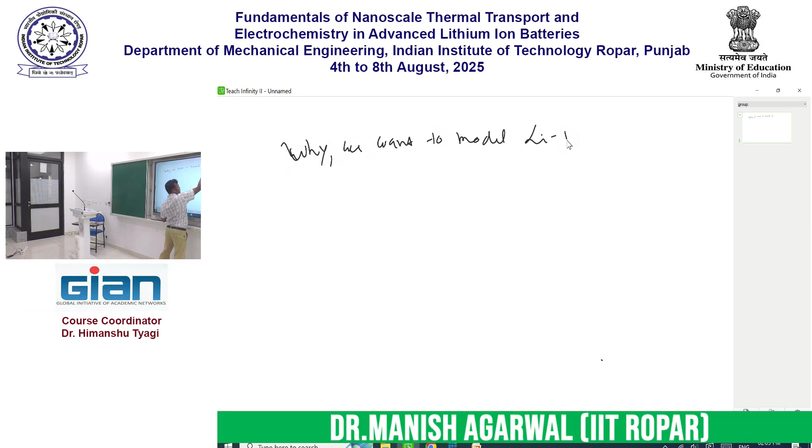So why? You can actually keep on asking or interacting. Why do we want to model the lithium ion batteries? Any comment or any input from the audience?

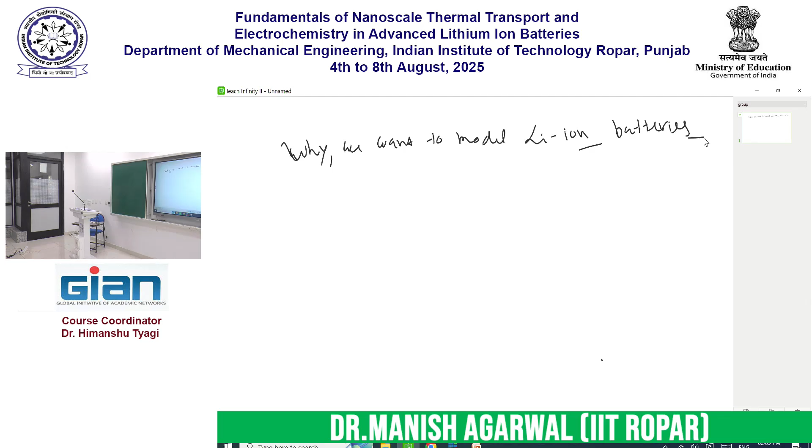No, I couldn't get that. For optimization of what? No, no, but that is fine - that is always the goal of any simulation, it's trying to minimize the experiment. But that is a very generic statement, right? First, the question is why - like what answers are we looking for from the electrochemical battery simulation?

To understand the quantitative aspect. Okay, so you understand the quantitative aspect, right? Which specifically quantitative aspect? Where we have a list of battery related parameters - current density, charge density, charge carrier, chargeability, and other kinds of things. So these are actually, in case of lithium ion batteries, physics-based detailed models. So we are actually going to understand how things are happening in the positive electrode, negative electrode, and what is happening in the electrolyte. So what are the outputs we are looking for?

That is again a bit generic. We ultimately want for any system, we want the efficiency to be enhanced, but specifically, what are the outputs we are looking for? Amount of the energy stored. Okay, so fine - amount of energy, or amount of energy I can draw in a particular cycle. That can be one of the outputs.

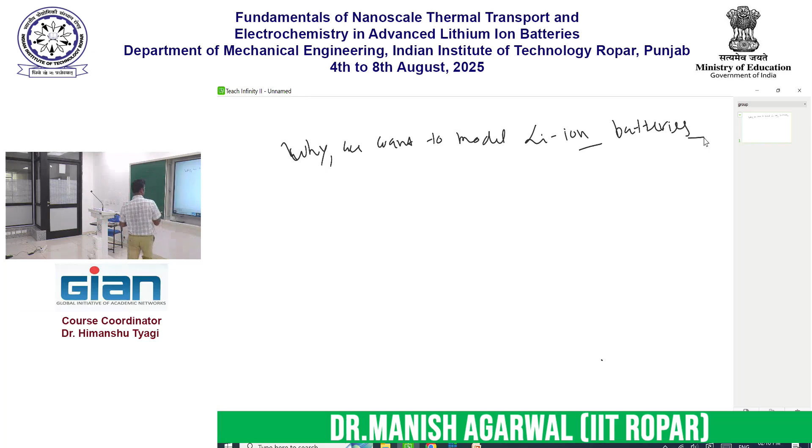In particular, let me do it - so ultimately, one of the plots that I am looking for is the voltage that is going to be produced from the battery and the time, or in some way, state of charge. So how is the voltage response of the battery? What is the typical voltage of the lithium ion battery? Anybody know?

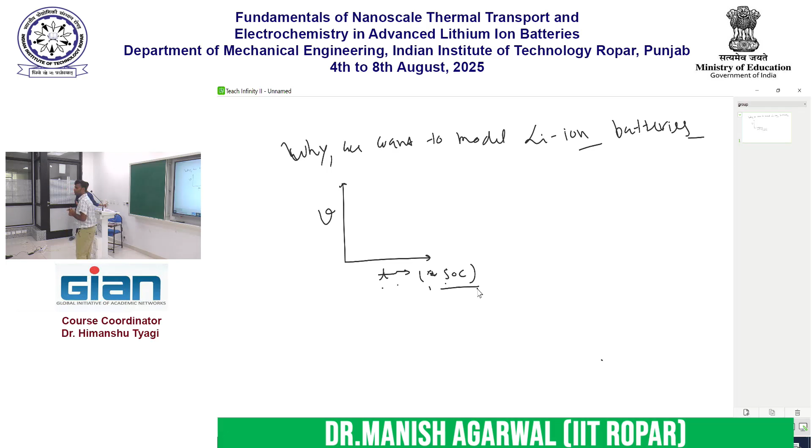So what is the typical voltage of a lithium ion battery? Okay, 4.2, 3.6 — these are the typical numbers. But that is actually when the battery is fully charged. When the battery is 100% charged, the typical voltage is 4.2V. But slowly the terminal voltage actually decays, right? So the typical graph looks like this.

But this is actually not fixed. This particular response depends on how fast you are doing the charging, or in this case discharging. It is not something which is a fundamental characteristic of the battery that will work for every kind of load cycle.

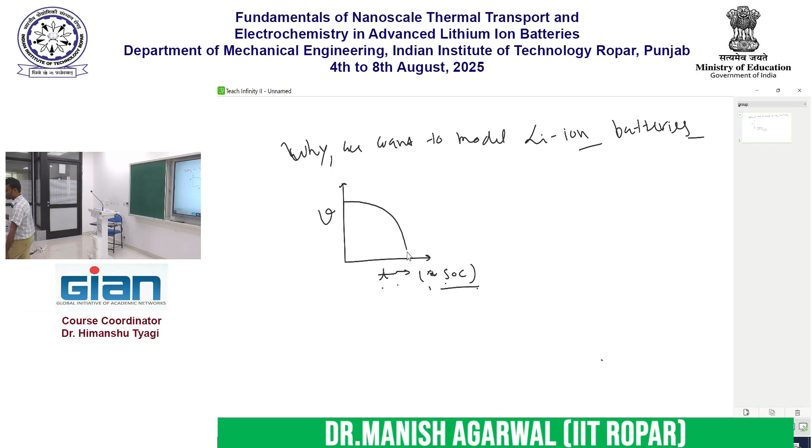For example, nowadays there is a lot of emphasis on battery development, like how fast you can charge your battery. You want to charge at 1C, 2C, as fast as possible. But why doesn't everybody just start charging the battery faster by supplying more current? Because there are ramifications to that.

So there's the theoretical capacity and the actual capacity that you get out of the battery in a particular condition. That depends on the charging or discharging speed. So we want to know up to what charging or discharging rate we can actually draw a sufficient amount of power.

Second, for the thermal aspect calculation, we need certain parameters from the electrochemical physical model — for example, voltage, current, and other macro level parameters. So those we also want to give to the thermal model. This is one more aspect.

Another aspect is optimization. Ultimately I want to design what is the separator length, what is the porosity of the separator — I will explain those things in more detail — and what should be the cathode particle radius or positive electrode radius. I want to determine all these parameters and see how they actually affect overall battery performance.

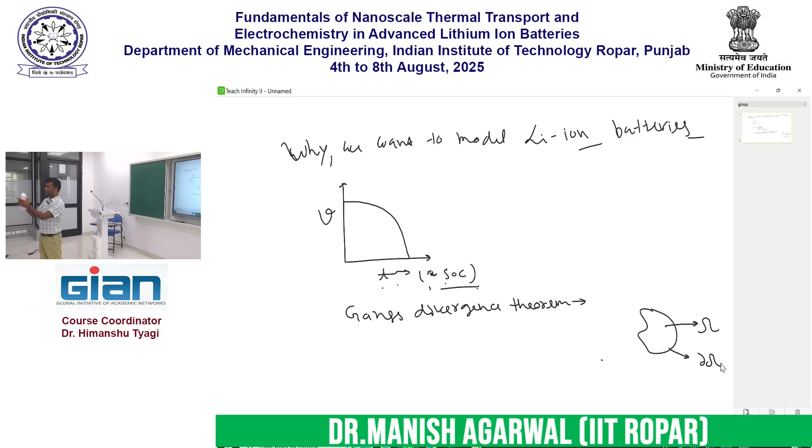So let's say there is one particular arbitrary domain which has a volume V here — let me call it omega, to be consistent with the rest of the lecture — and the boundary of this, or the area of this, I call del omega. These are the typical notations I am going to use: omega to refer to any domain, capital omega, and the partial of omega to denote the boundary of the domain. You can imagine, for example, this is a bottle, and the boundary of it, whichever is on the surface, is the partial omega, and the overall domain is omega.

Now, the Gauss divergence theorem tells that suppose there is an arbitrary vector v, and I draw a normal n tilde — a unit vector which is normal to the domain boundary. Then the integration of v tilde dot n over the boundary is equal to the integration of the divergence of v over the omega.

Just for understanding, the divergence of v is defined as del v1 over del x plus del v2 over del y plus del v3 over del z, where v tilde is an arbitrary vector with three components, v1, v2, and v3. So the divergence of that vector is defined as del v1 over del x plus del v2 over del y plus del v3 over del z.

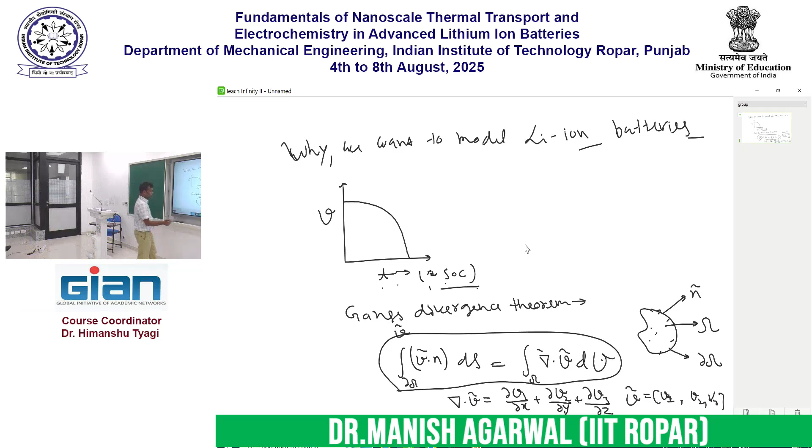So the most refined version of the physics based model is known as micro scale model. That is the most detailed one, where you are putting almost everything that is there in the battery into your model. That is the most detailed kind of calculation that you can do.

There is a slightly coarser level of the model known as the homogenized model, that is the second level of the model, and so there is a simplification from the micro scale to the homogenized. Again, I will go into the detail as we go along. Right now, just giving the overall picture.

Then there is a model called DFN model, or more popularly known as P2D model. This is perhaps the most popular model for battery modeling. Whenever you do electrochemical analysis in software like COMSOL, by default you are using P2D or DFN model. So this is a kind of 1D model, actually known as pseudo 2D model. Why it is known as that, I will explain to you later.

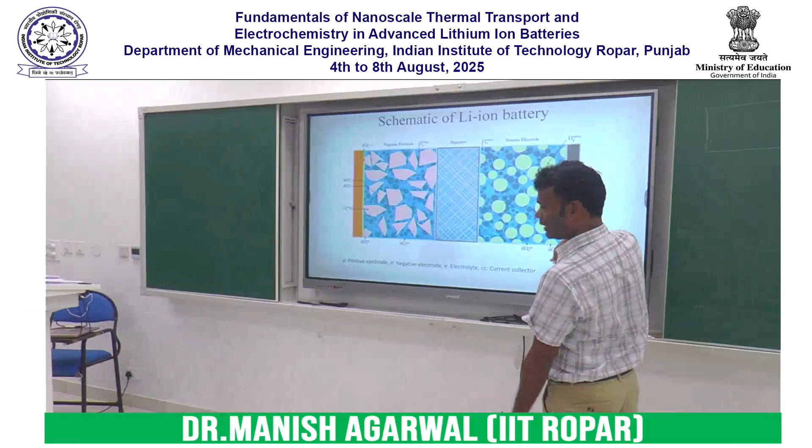So the first thing, let's start from the rightmost and leftmost. There are two blocks, known as current collectors. They are just metal strips which are taking out the current from the lithium ion battery to the external circuit, nothing much. So these are not something fancy, these are quite preliminary stuff. Now after that we have the positive electrode. I will just denote it with the symbol P.

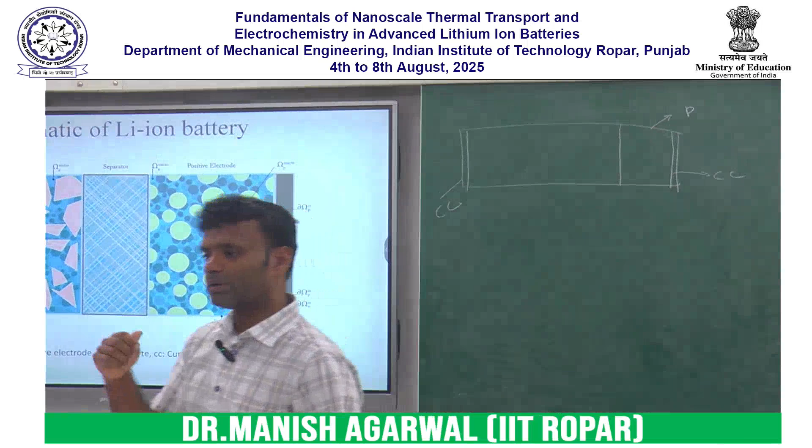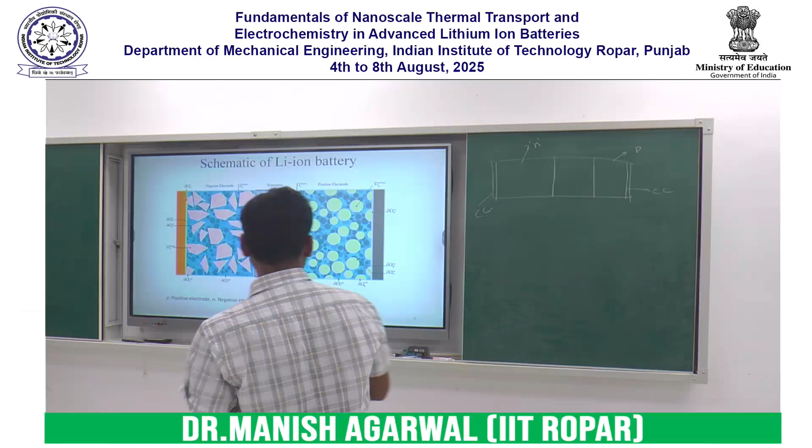Then there is a separator, and then there is a negative electrode, which I am going to denote by letter N. And separator, anyway we won't need the symbol, but for completeness, let's write S.

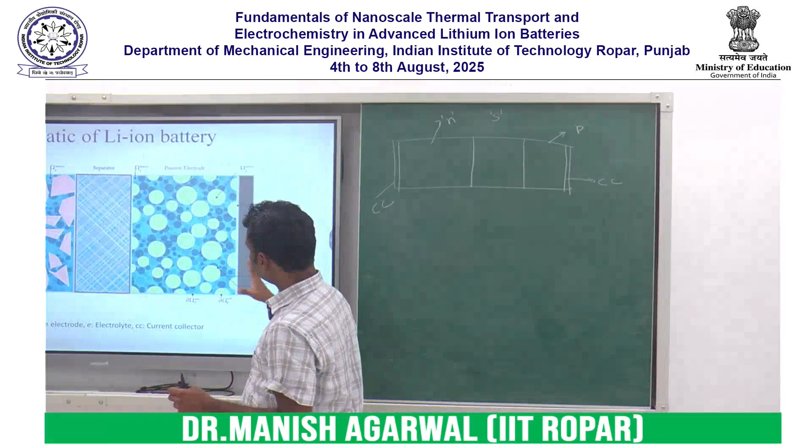So let's try to see what it is contained. If you see this positive electrode, there are some kind of particles. I think Ankurji was talking about some kind of lithium compound which makes the positive electrode, if I am correct, some kind of lithium cobalt oxide. So these green particles are those only, or an alternate to that. For example, I think there is manganese, NMC, yeah, it is called NMC. So there also it can be actually a particle of those.

So ultimately, whatever the underlying material is there, these are the particles. Now you see a bunch of black particles flowing here and there. These are binders to keep all these particles, where the lithium is there, together. These binders are not actively participating in the chemistry of the battery; they are just there to act as a glue.

The blue thing I am showing is actually the electrolyte. Unlike the conventional picture you have, where the electrolyte is different and the electrode is different, this is not how the lithium ion battery is. Inside the electrode also there is an electrolyte, and this is a very important thing to know when you are doing the modeling.

So electrolyte is present in the electrode also. The electrode is a porous medium where the electrolyte and the electrode particles are actually present in the same domain. And there is another name for these particles: they are commonly referred to as active particles, because they are actively participating in the overall domain.

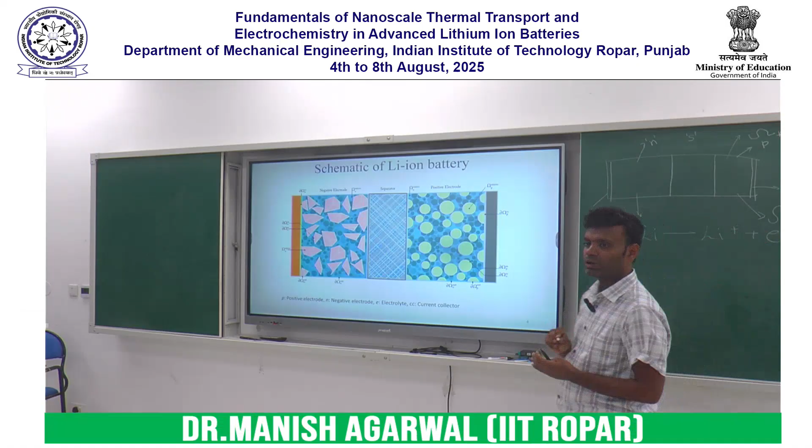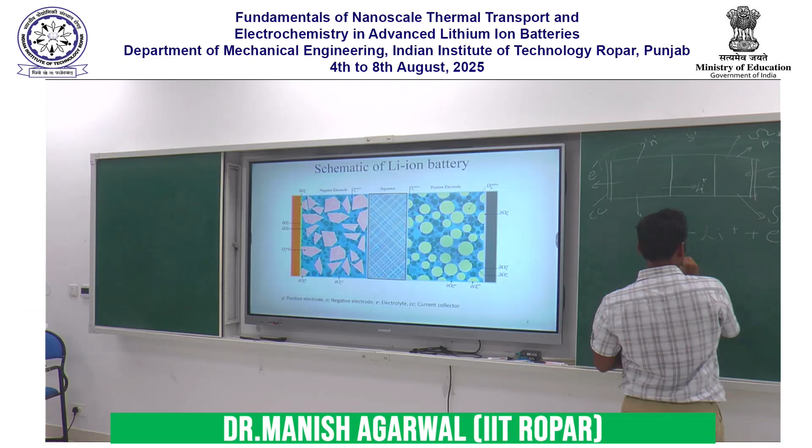So what is happening? Lithium here is actually getting broken into Li plus and electron. The positive ions are actually moving toward the positive electrode, and the electrons are going away through the external circuit, taking the whole path, coming back here, and then Li plus and electron again make the lithium.

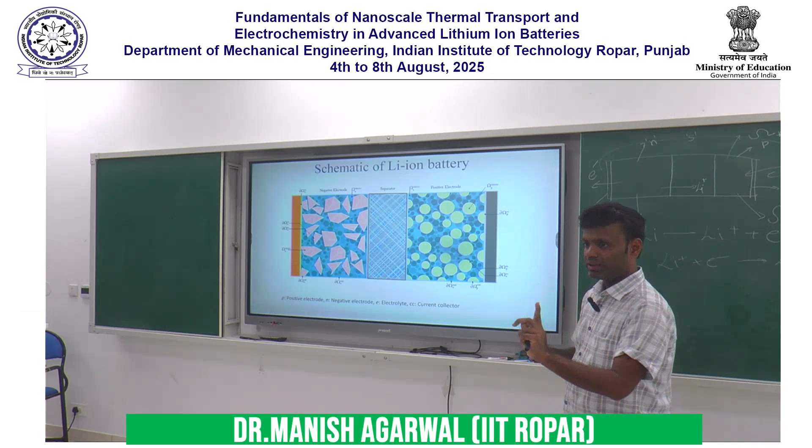So in the electrode, there are two things that are moving. What are they? One is lithium, not lithium ion, and electrons. Lithium ion is not moving in the electrode. Lithium and electrons are moving there. Lithium ions are moving inside the electrolyte. These are the two things which are moving: in the electrode, and what is moving in the electrolyte is the lithium ion.

We should know which species is present in which domain; only then can we actually develop the model. So lithium ions are moving in the electrolyte. Apart from the lithium ion, which is known as cation because it's a positive ion, there are negative ions also moving. For example, if you have LiPF6, then it is Li plus and PF6 negative, sorry I don't remember the exact formula, LiPF6, and here also it will be PF6.

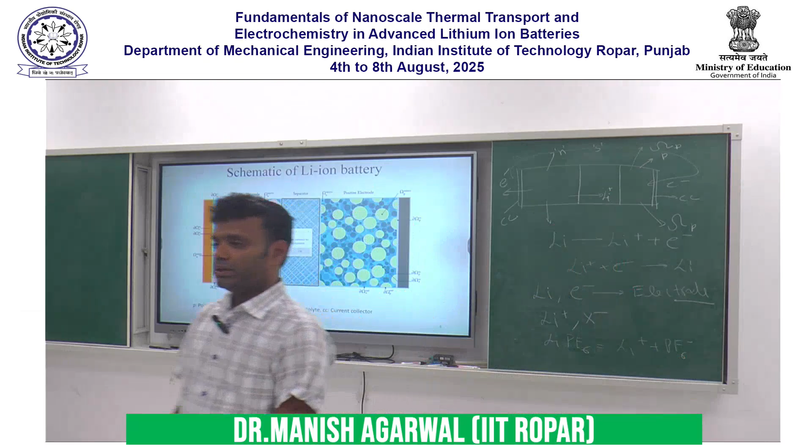So there is a cation. So in the electrode we have lithium and electron. In the electrolyte we have the lithium ion, and I am writing X minus for some kind of anion. So this is in the electrolyte.

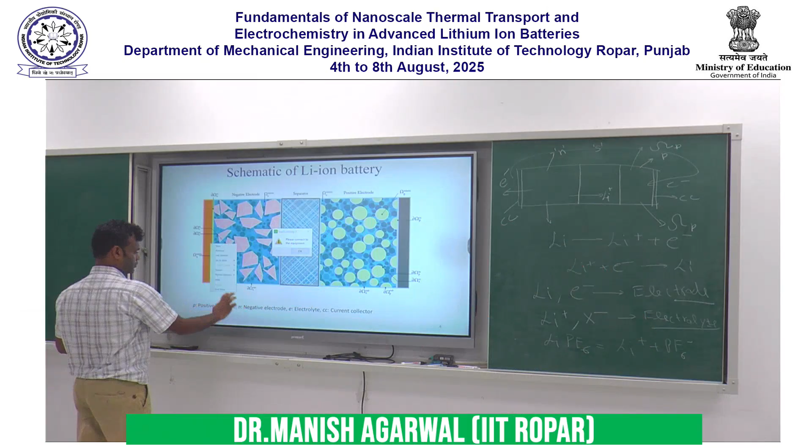Fine, so let's go to now again. Sorry.

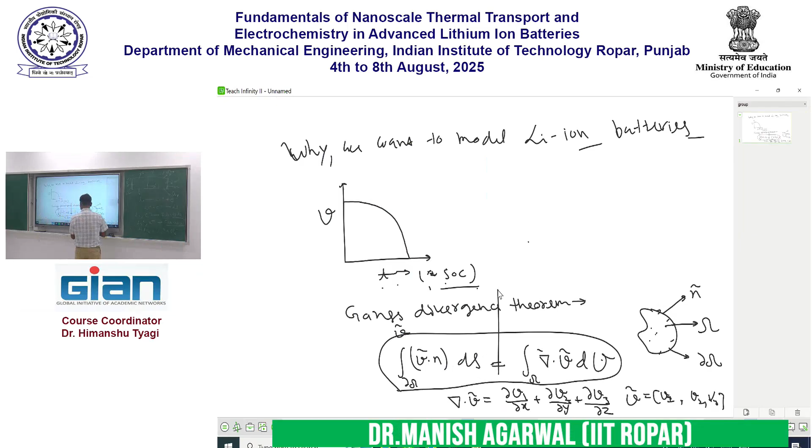Acha, new one means this is what. Fine, thanks. Okay, fine. So now let's talk about the electrode, right? And then we'll go to the one.

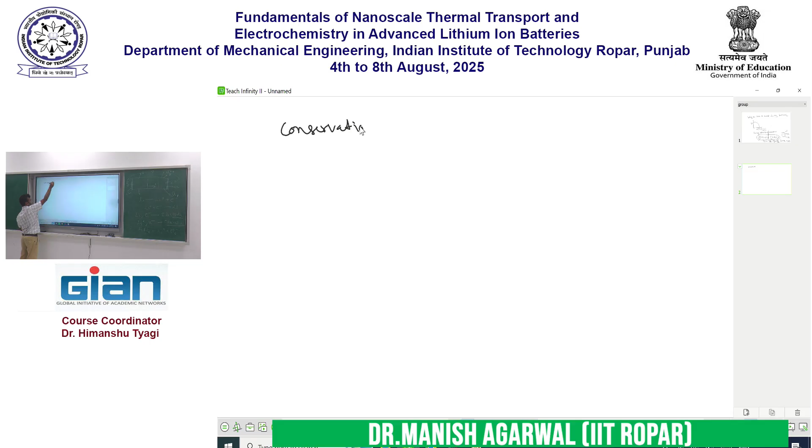Right, so in electrode, first let's talk about the conservation law in electrodes. Okay, sorry, let me know because sometimes this pen is not writing.

Okay, so first, there are two species. Let me define something. Do you know what is Faraday constant? Or do you know first what is a mole? What is 1 mole? There is a number, right? 6.023 into 10 to power 23. So 1 mole means this is the number of atoms or molecules of that particular quantity. So this is just the actual number, not the mass or something.

And the Faraday constant means the charge that 1 mole of electrons carries. That is the Faraday constant, the amount of charge present in 1 mole of electrons. Okay, so conservation law in electrodes. Fine, so let's talk about the 1 second.

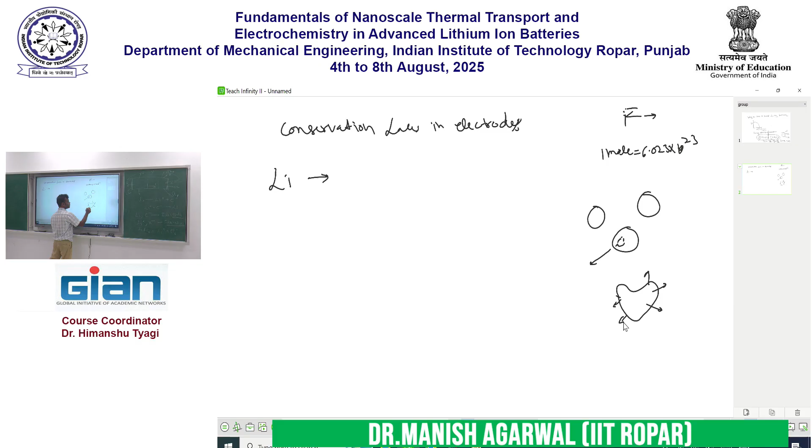So then there are two things happening. One, the lithium ions are actually moving out, right? By convention I'm taking the moving out thing; if I take the negative of that, that is the moving in thing. So the moving out, I'm going to denote the flux as N tilde lithium, that is the flux. You understand flux, right? For example, if there is a pipe flow happening, what will be the flux?

That will be the velocity into the area, the amount of flow that is actually happening. So this is the flux, and the concentration of the lithium ion I am going to denote by C_Li. Okay, I have to write it very slowly. So this C_Li is the concentration of lithium. The unit of that is mole per unit volume.

So now let's do the mass conservation. The amount of lithium inside the volume is the concentration C_Li, integrated, or you can denote it by dV. This is the total amount of lithium present in this volume. And what I am doing is writing the derivative with respect to time, how much it is changing.

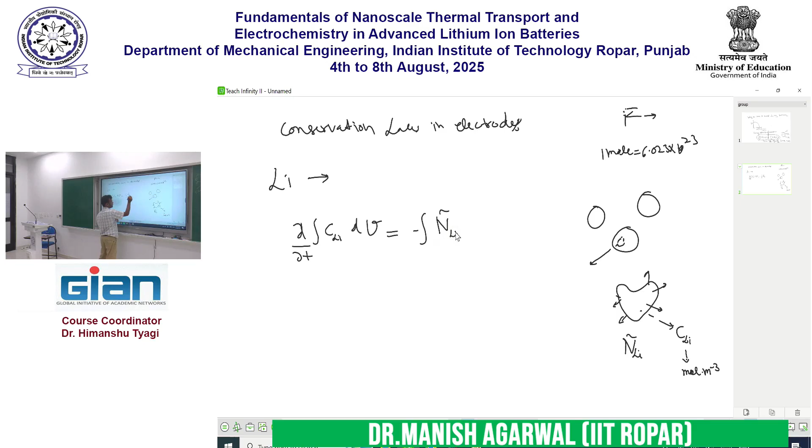So the rate of change of lithium mass should be equal to negative of the amount of lithium that is going away. So then it will be minus N tilde Li dot n. What is the flux? Flux is a vector, and I take the dot product with the normal, because whatever is happening in the tangent direction is not going to go out, it just remains within the boundary. So that is integrated over the whole surface.

Now what I do is apply the Gauss divergence theorem. So then it becomes del C_Li over del T; I take this derivative inside the volume, plus I take this quantity on the left-hand side and apply the Gauss divergence theorem. So this becomes divergence of N tilde Li, dV, because now I have converted the surface integration into the volume integration.

Now if I combine these two terms, it becomes del C_Li over del T plus divergence of N_Li, the flux, into dV, equal to 0. Because this is an arbitrary domain, I can conclude that the integrand is equal to 0 when this integration is 0. So this becomes del C_Li over del T plus del dot N_Li equal to 0.

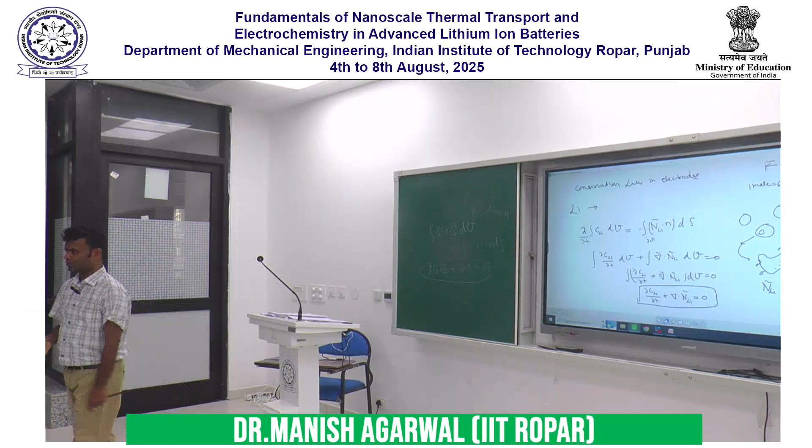So this particular form is very common. If you derive the mass conservation, again you will have the same kind of form. In the heat equation also it is the same form. So the steps are used in various domains, and the form you get at the end is going to be more or less similar. Sometimes there may be a vector, sometimes a tensor, that is a different thing, but at the end of the day you will always get the same form. So you can relate with the heat equation also. It is the same thing.

Rho Cp del T over del t - here the temperature is there, the concentration, the heat flux, here there is a mass flux. Otherwise it is the same thing. So it's not something very new. Those who are familiar with heat transfer have been seeing this kind of equation anyway.

So now the lithium is done. Now we'll move to the second species, which is the electron. Again, the good thing is I don't need to derive it again. The conservation law is the same, only difference is there it was concentration of lithium, here it's concentration of the electron, nothing else. So now let's talk about electron conservation.

So it is going to be del C(e-) over del T plus divergence of n(e-) tilde equal to 0. Same thing again. The only difference is this term I can drop to 0, and the reason is the movement of the electron is so fast that the time scale of this phenomena is in the millisecond or nanosecond range. So you don't need to consider the first term. This equation becomes even simpler compared to the previous one, and that is divergence of n(e-) tilde equal to 0.

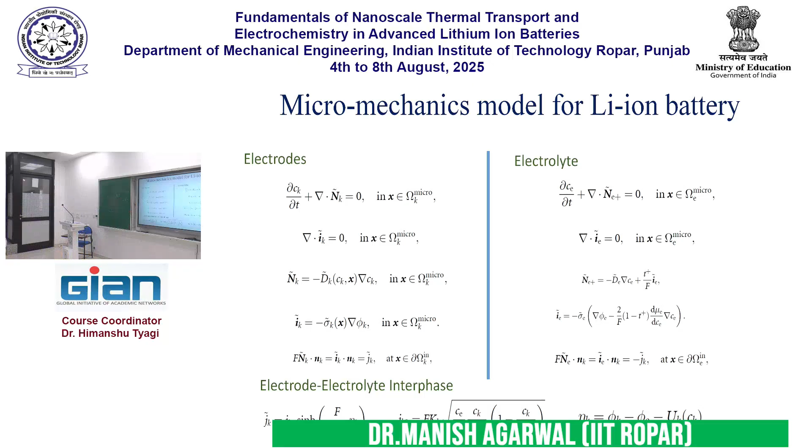So ultimately in the electrode, I have to solve only for the conservation of lithium and the conservation of charge. The first equation is the conservation of lithium, and the second is the conservation of charge. These two are the governing equations.

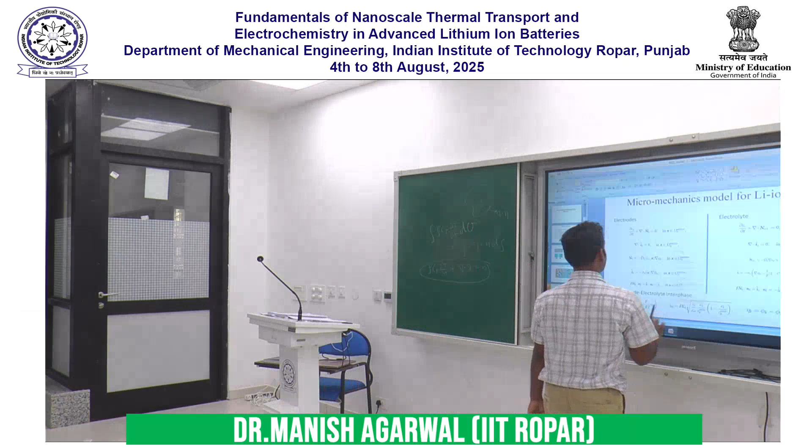I should check the time, and then I can... okay, still time, I think we can easily cover it.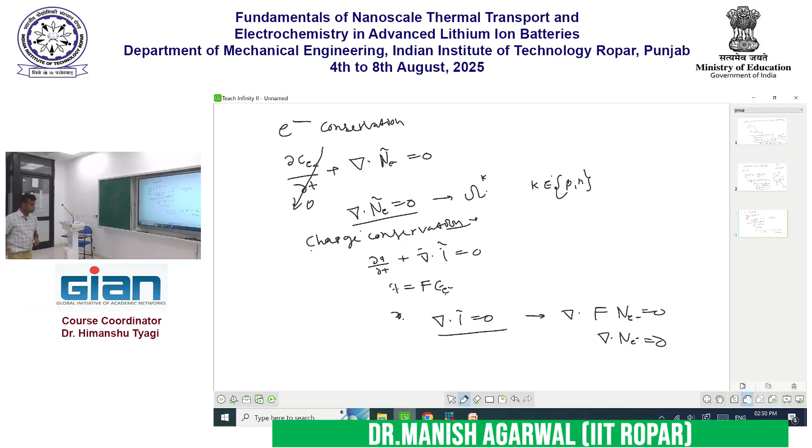So what was the unknown in the two equations? There was C lithium, that was one unknown. Another unknown was the flux, n tilde lithium ion. Another one was the current. But two equations cannot be used to find three variables, so we need some kind of relationship between these variables. Now comes the second one, what's known as the constitutive law.

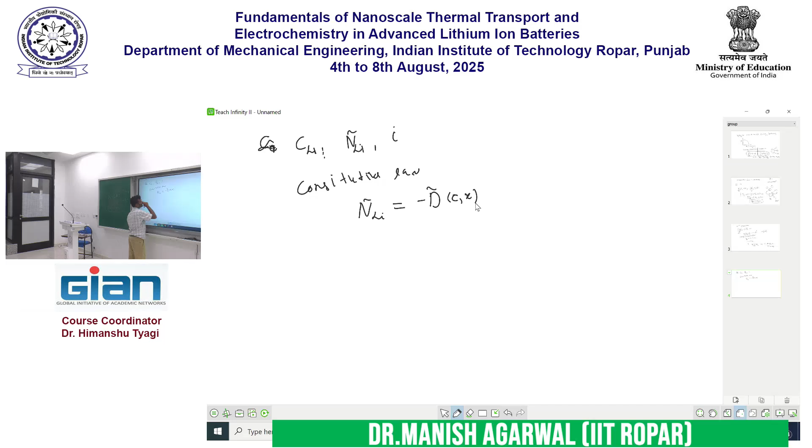So the NLI tilde is equal to minus D tilde, C comma X. I should actually use the K also, but it's okay. And then I have the gradient of C, right? I think that is fine.

So the flux of the lithium particles, or lithium molecule, is going to be related to the concentration through this manner. You have seen this law, right? There is a name to this, Fick's law. So it is saying, if I can write in the 1D form, it is going to be minus D into del C over del X, right?

The way heat transfer happens, right, from a high temperature to a low temperature. Similarly, if you have two species, where one place has a higher concentration and another is lower concentration - if you take salt in your kitchen, and you take two solutions, one with high salt concentration and one with low salt concentration, and pour them together and leave it for some time, they actually will become, over a period of time, the salt will diffuse from a high concentration region to a low concentration region, and equilibrium will be reached. So like heat transfer from high to low temperature, here also the same thing.

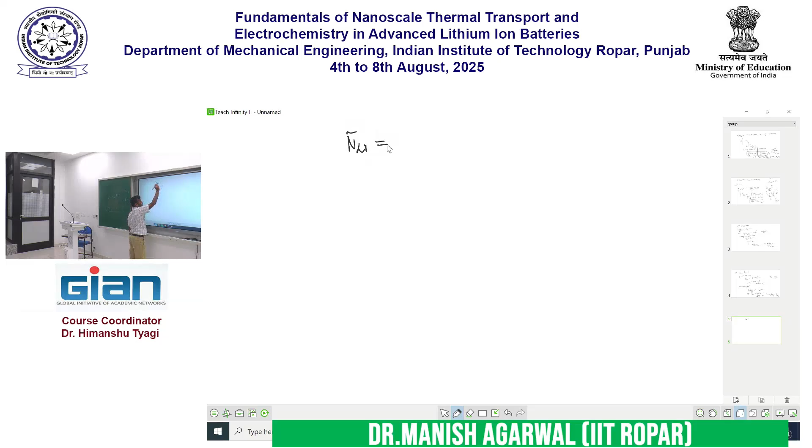Similar to Fick's law that we saw for the electrode, let's talk about how to relate concentration and flux in case of electrolyte. So N tilde Li plus is going to be minus D, I will write E here—I think we don't need to keep it as a function of concentration that much. Minus D_E del C, the concentration of Li plus, plus overall plus, and I have T plus I_E divided by Faraday constant. Let me just confirm this one—mostly it should be right, but so that I don't tell you anything wrong. Yes, it's fine. This one is fine.

So the first term is similar to the electrode case, where due to the concentration gradient there is movement of the lithium plus ion—that's the same as the previous case. There is an additional term: even if the concentration gradient is 0, there is still going to be movement of the lithium plus ion, due to the electrostatics, the electrical effects going on, the amount of charge, the current that is moving. This T plus is known as the transference number, which is generally given and can be calculated experimentally. The typical value is around 0.35. And F is the Faraday constant, I is the current. So again we are able to relate the flux and all those things.

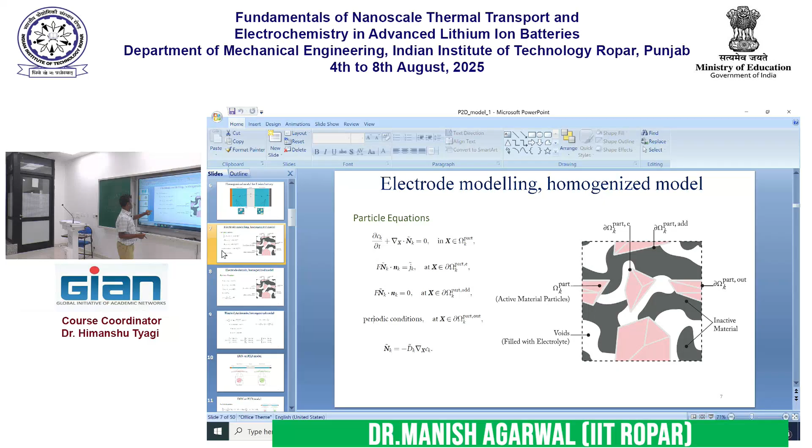So we have done quite a bit of this, this is the electrode equation, this we saw, right? This we know, the current charge conservation, this is the constitutive law, this is how the current is actually dependent on the electric potential. Again, electric potential is the amount of work required to bring the unit charge, right? So this is what it is.

Now this is the electrode equation, these four, these are the electrolyte equations. So del dot, this is the conservation of the lithium plus ion, this is the conservation of the charge, this is the constitutive law relating the flux of the positive ion with the concentration gradient as well as the current, and here the current is again related with the potential gradient as well as the concentration gradient.

So these two and these four are actually the partial differential equations that you have to solve in order to simulate the electrochemical phenomena in the lithium ion battery. Along with this, two here and two here, four constitutive laws. These are the equations that you need.

The main thing to remember here is that the constitutive law in case of the electrode is very simple, because only the electrons are moving. While in case of the electrolyte things are much more complicated, because the movement of the current is generated by the cation as well as the anion. Although we are not going into the electrochemistry that much, because of that the underlying constitutive law actually becomes much more complicated, and the current is actually a function of the chemical potential also.

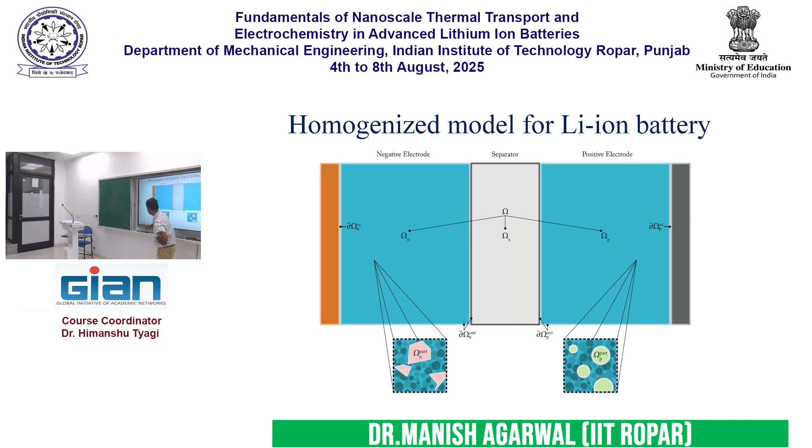This is the Faraday constant. One second, this is actually very sensitive.

At the boundary, you have the current flowing out. So the current I tilde dot N tilde equals the JK current given by the Butler-Volmer equation, because ultimately I want the boundary condition in terms of current and flux. The current is given by IK dot NK equal to JK, and to get the flux, you just divide by the Faraday constant.

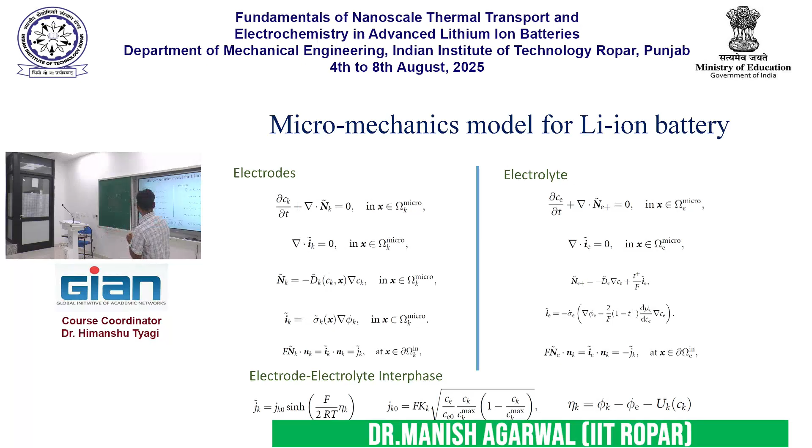And similarly on the electrolyte side. So this is the boundary between the electrode and electrolyte, but there are other boundaries too, here and here. In this case, phi equals 0, the potential is equal to 0. Here you can specify some kind of potential, or you can specify some kind of current. I can talk in more detail, but I think that is fine.

So the only thing is you have to specify this is also a boundary, top and bottom. At the top and bottom there cannot be current going out, there cannot be flux going out. So ultimately at the top and bottom, it is I tilde dot n tilde equal to 0, and n tilde dot n tilde equal to 0 for the flux. There is no current flowing out at the top and bottom, so both flux and current are zero there.

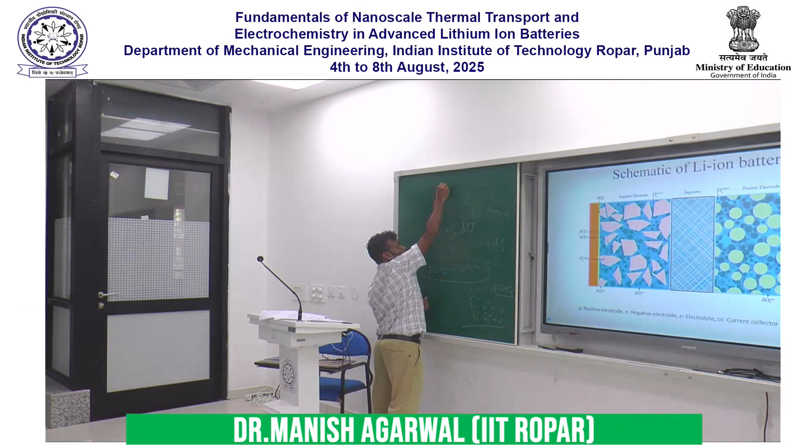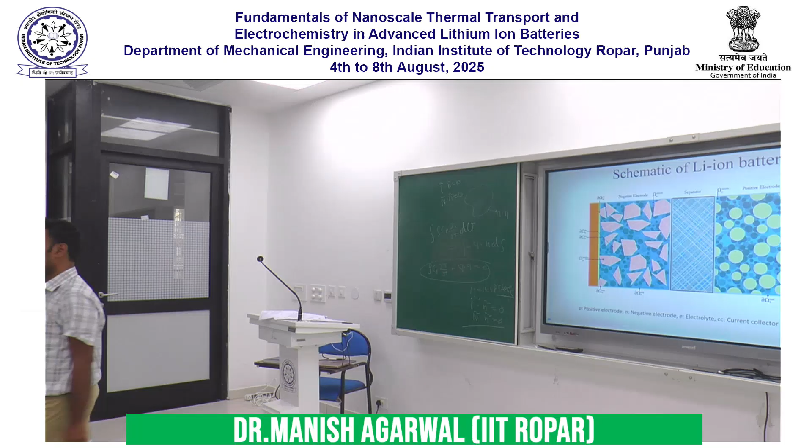The separator you don't need to model. When you model it as an electrolyte domain, it is automatically taken care of. There is one point I omitted: for the positive electrode, the equation you are solving for only applies here, so this also will be a boundary. Here you also have to provide boundary conditions, which are the current I tilde dot n equal to 0, and the flux tilde dot n equal to 0, because once you reach the separator, all the current is taken care of by the electrolyte. The electrode particles are no longer carrying current, so that's why you take this particular condition at the boundary between the separator and the electrode.

My battery is discharging. No, yeah.